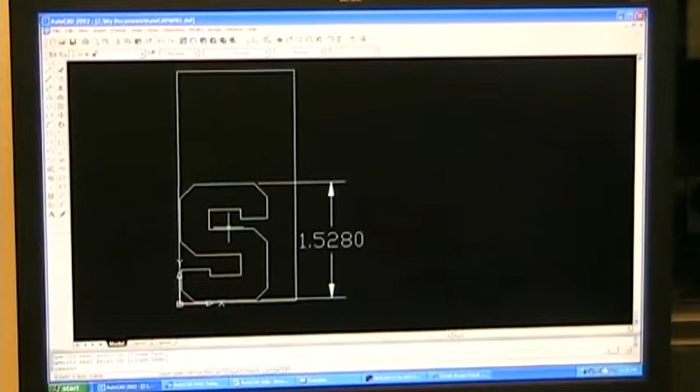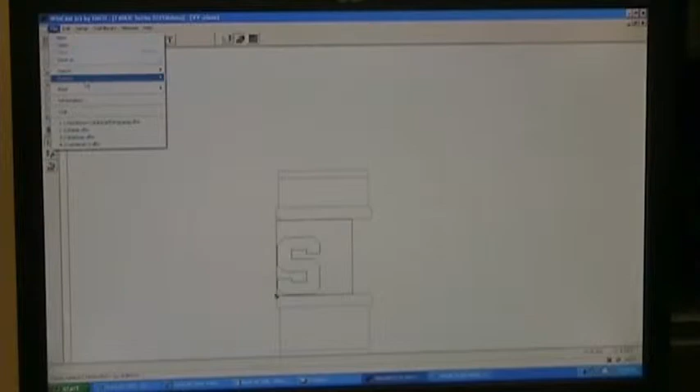And then what I can do is I can take this S. I have a multi-arrow move tool I can select. I can just click on any point, move that into the center, save it, go over to WinCAM and import it, drawing, MSU, and hit OK.

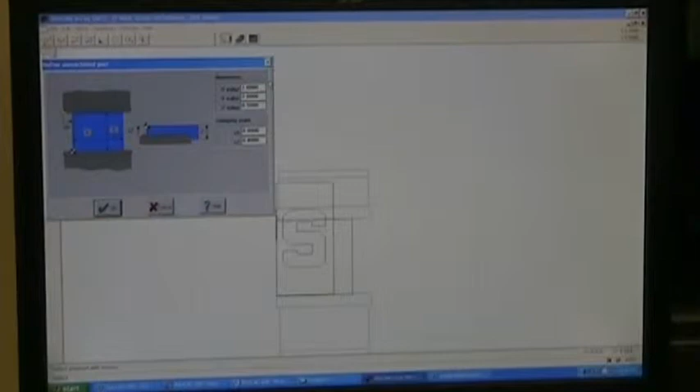Now this looks a little bit odd. What I'm going to do is I'm going to change the setup. I'm going to define the unmachined part, okay, so I've created my Spartan S on a different size block.

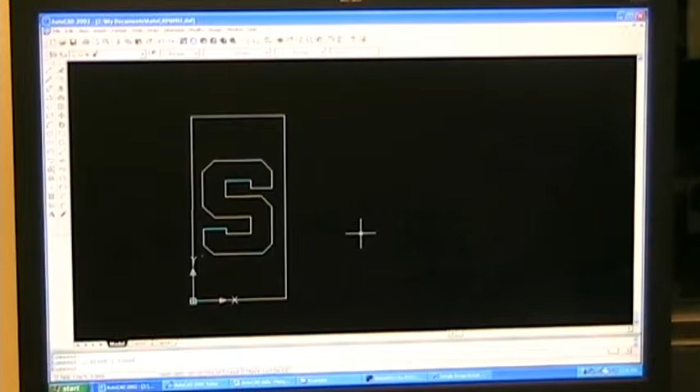It's 3 inches by 1.5 inches. And the mill, I'm going to go over to the other side and I'm going to show you what that import looks like. You have a 2 by 2 inch block here, which is the default size, and this one is outside of the mill. Our clamp, our vise, doesn't extend to 3 inches. There's a work envelope right here in this green dotted line that are our limits.

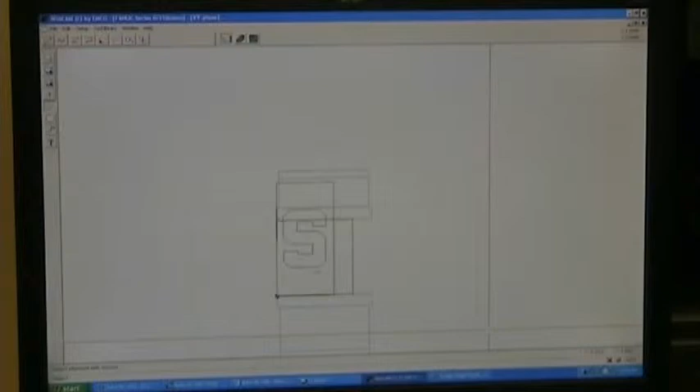So what we have to do is we have to turn this S on its side. So I'm going to go back to AutoCAD. I have this drawing here. It's very simple. I can just choose the rotate button, rotate, and I'm going to pick any corner. I'm going to pick the origin corner. I'm going to rotate it down on that corner.

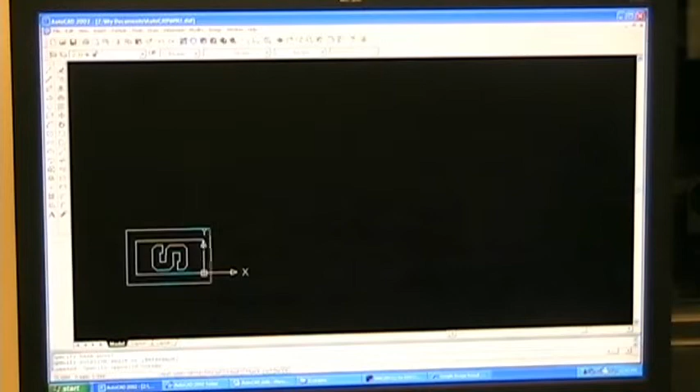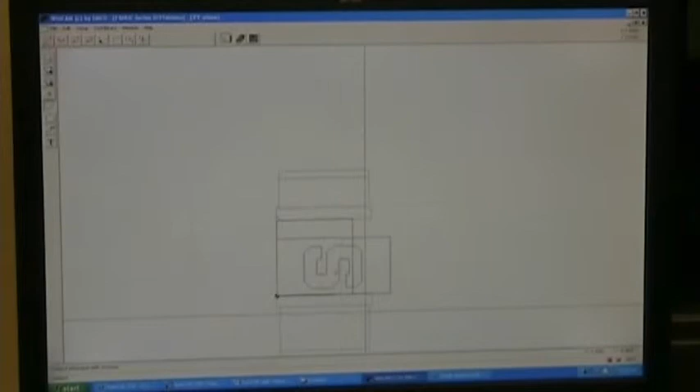Next, I'm going to highlight it again, and I want to reposition it. So I'm going to move it. I'm going to select this corner, and I'm going to have it snap in the origin. So I want everything to go off to the right and up. So I'm going to hit save. I'm going to go over to WinCAM, import my MSU DXF. Voila. But notice that the program doesn't think that the block is the same size.

It's still working off the 2 by 2, which is in the background. To change that, you go to Setup, Define Unmachined Part, and you have a bunch of values here. Well, I said our block was 3 inches by, so that's going to be the X value, by 1.5. The Z is the height.

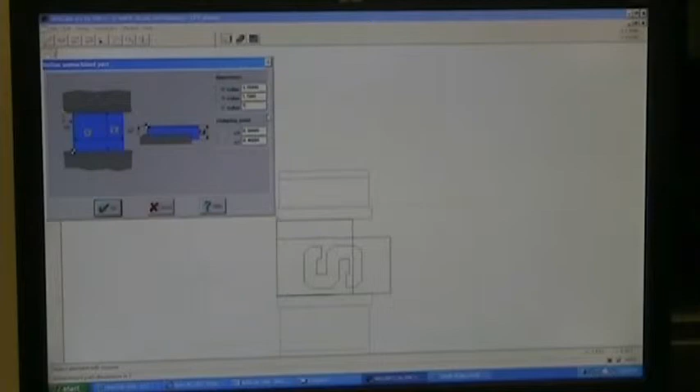Normally you want to type in 1 for this because we're going to use 2 blocks stacked on top of each other, so it extends beyond the vise. So we don't actually cut into the metal vise. And then when you do that, CZ is 0.25, so a quarter of the material is going to be exposed above the vise. So I'm just going to hit OK, and you'll see it'll snap into place.

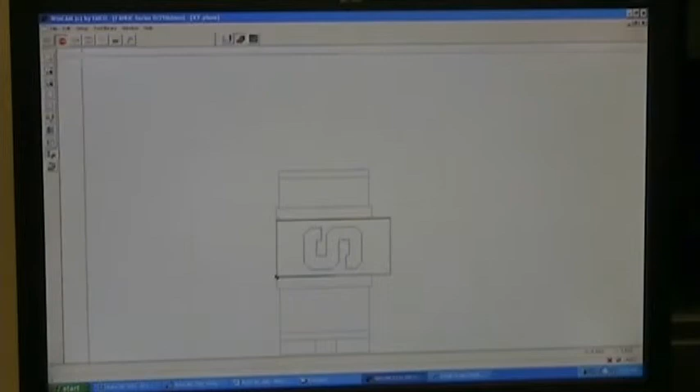The other video already covered how to write the code, but I'll continue on with this very quickly. Go to machining, turn the spindle on clockwise, select the 1/8 end mill, choose the pocket milling icon. We're only going to have one pocket. It's just going to be the S. So I select it,

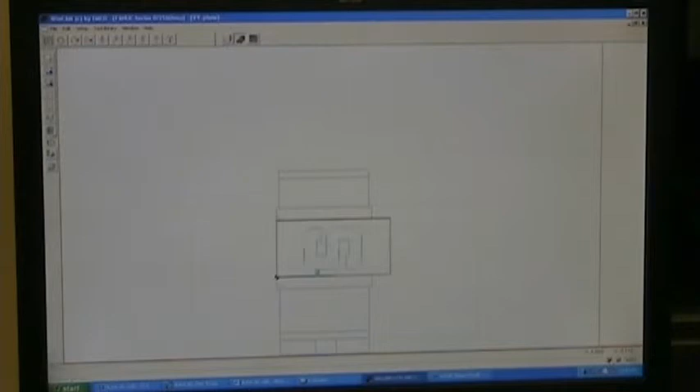and there is a gap. When there's no green check selected, there's a gap. There's an issue in the file. So I'm going to just close off that. I'm going to zoom in on our area. And what it is, it looks like there's a line off here, a stray line.

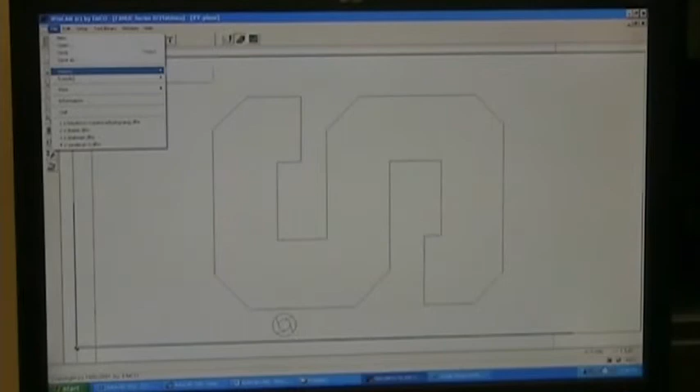So I'm going to go back to AutoCAD. I'm going to delete that guy, hit save. We'll do a re-import. MSU. When you import, a lot of your settings are reset, so you have to turn on the bit and you have to turn on the spindle direction every time. It still doesn't like it.

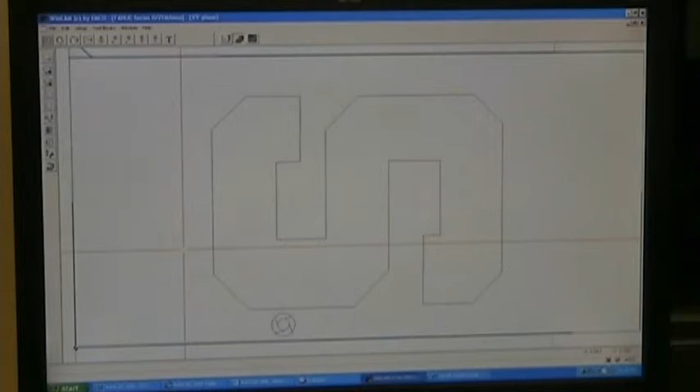I'm going to pause here. We'll come back. So we're back with the Spartan S now. I had 2 attempts where I found issues with it. The first one I had a stray line. The second time I had a slight overlap where I did not snap my drawing together precisely. So I had to go back to AutoCAD, change that, and re-import it once again.

So I came back to Pocket Mill. My green light checks up, or highlights up, so I double check it. And I'm going to cut the same values, 0.15, 0.05 per pass, so 3 cuts to get to the depth.

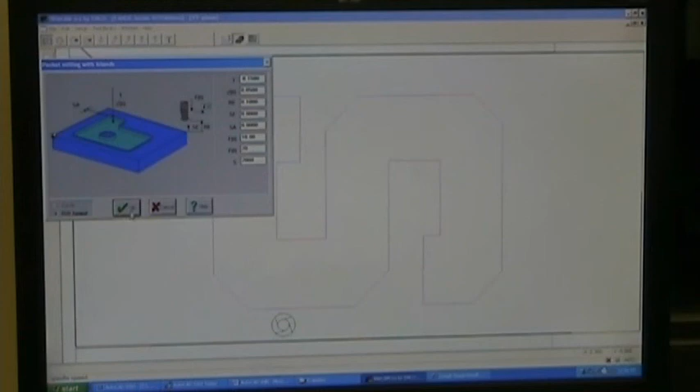I'm going to choose 20 for my FF, 20 inches per minute, and 2,000 revolutions per minute. And that would be a finished product for the Spartan S. We'll save that.